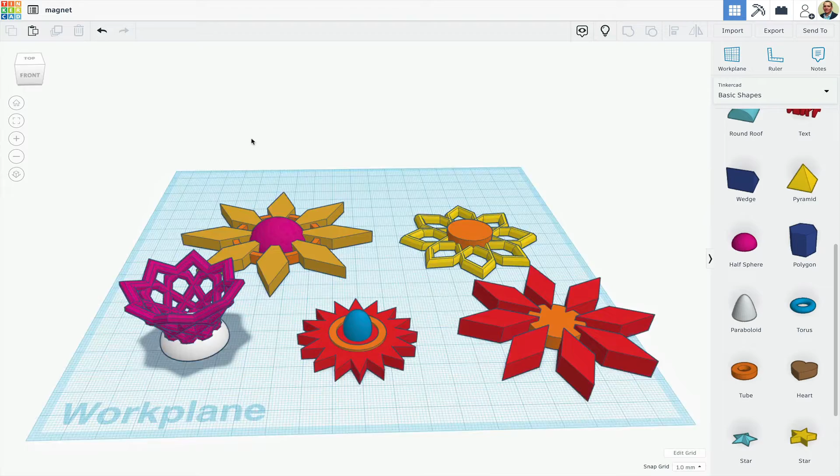Let's do a walkthrough of a way to use duplicate and repeat with rotate in Tinkercad's 3D editor to make designs like these. I want to turn this box into a diamond shape, so I'll rotate it 45 degrees, remembering to keep my mouse within the degree ring of the rotation circle so that it rotates in 22.5 degree increments.

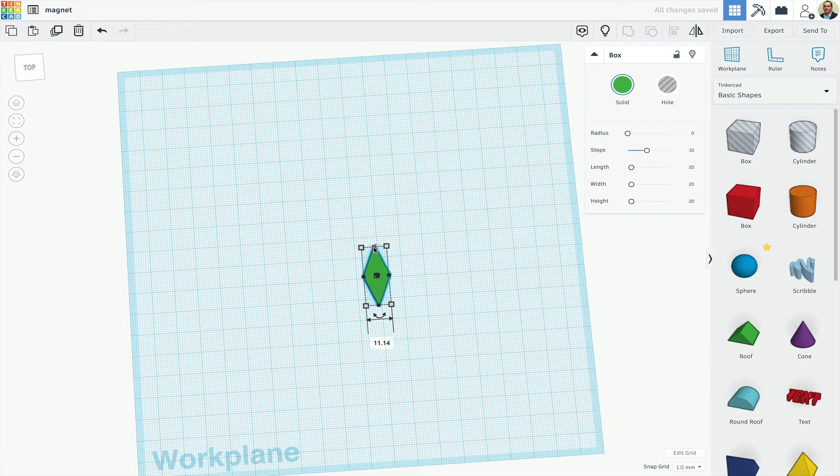Then I'll make it skinnier and longer. Next, I'll bring out a cylinder that I'll size down a bit and max out the number of sides so it's smoother.

Now I'll hit the duplicate button or click Ctrl D to copy the diamond. I can align these shapes with the Align button or just typing an L, and they align properly in one axis but not the other.

I'll undo that, move the diamonds a little closer together, shift-click on each diamond but not the cylinder, then click Command G to group them. The diamonds now act like one object, and they will align properly with the cylinder.

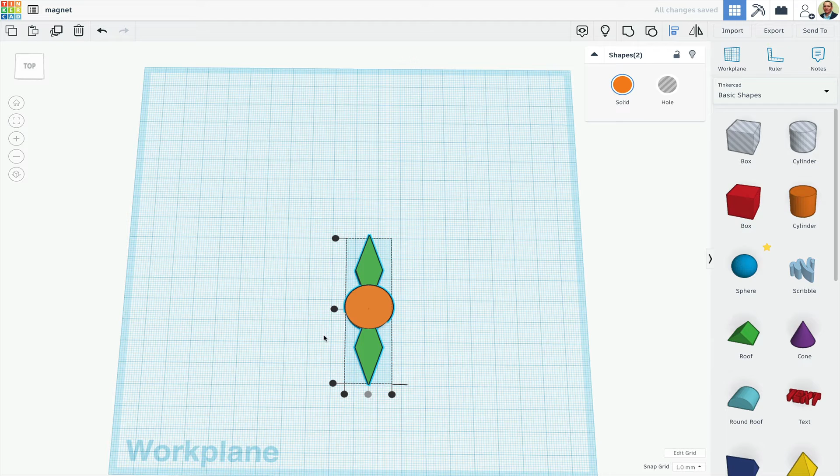I'll click Command D to duplicate and repeat, and I'll be sure to not click elsewhere. Now, when I keep hitting Command D, it will rotate copies by that same amount.

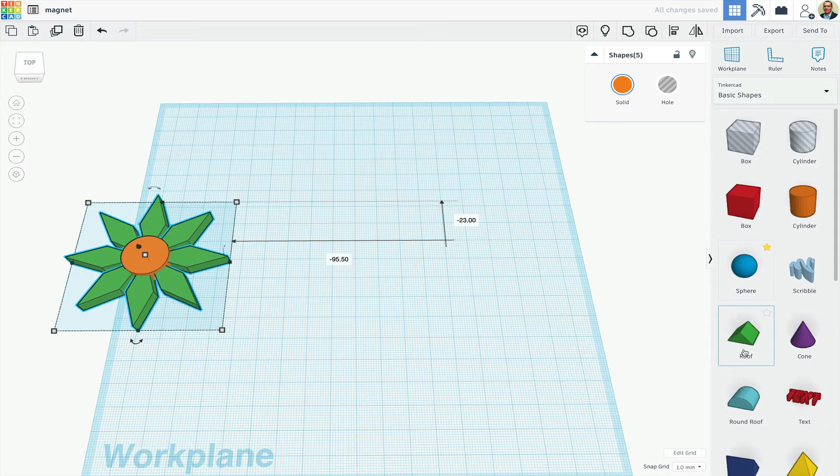Let's work with a torus shape next. Here are the dimensions I'm working with, and you can experiment with the properties that you like.

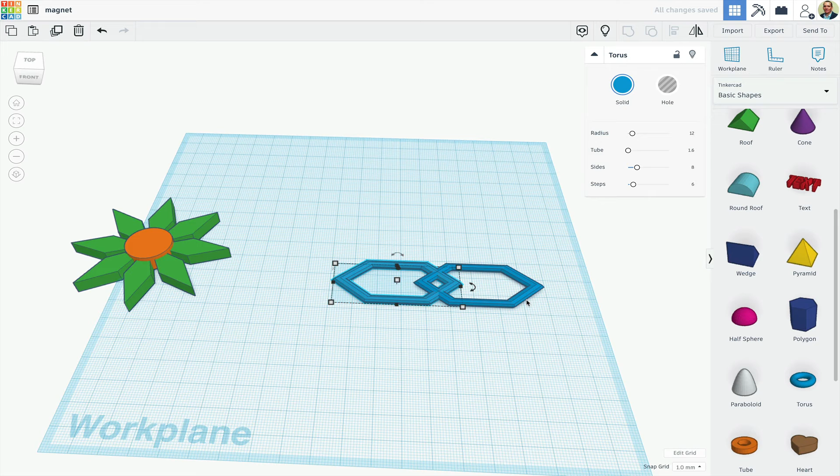I'll stretch out the torus with one of the black handles and then duplicate it. Slide it over with my left arrow key. Select both shapes and use my duplicate and repeat trick to spin them around.

Here's another trick. To make 3D printing this more likely to be successful, I'll raise the height of the design to 10 millimeters.

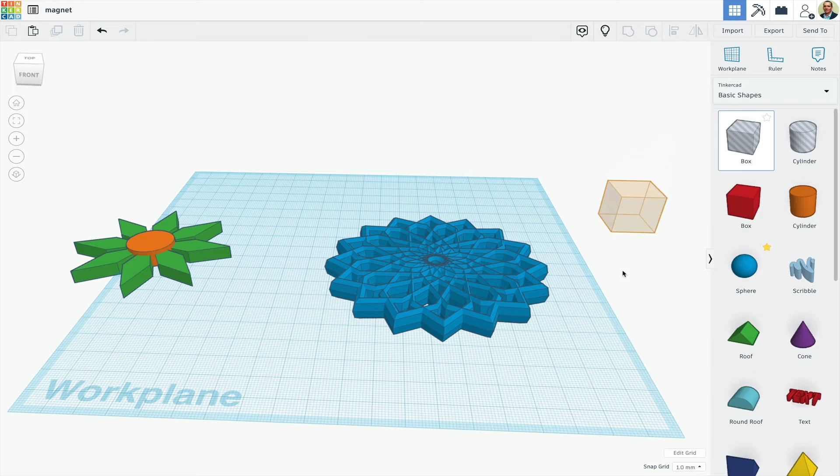Then add a box that's a hole at half that height, 5 millimeters. When I group these, it will slice off the bottom half, making the bottom flat and better for printing. Type the letter D to drop it to the work plane.

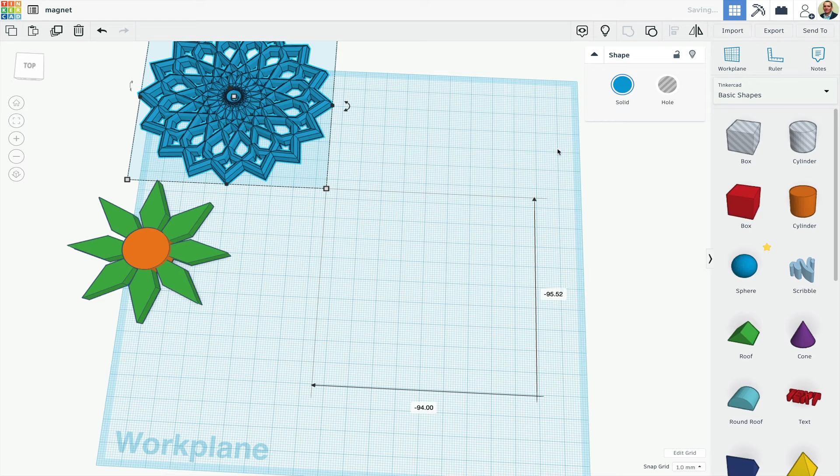Finally, there's even more we can do with a torus. I'll give this one similar properties as the first. Now I'll rotate it 45 degrees up, type the letter D to place it on the work plane, hit Ctrl D to duplicate it.

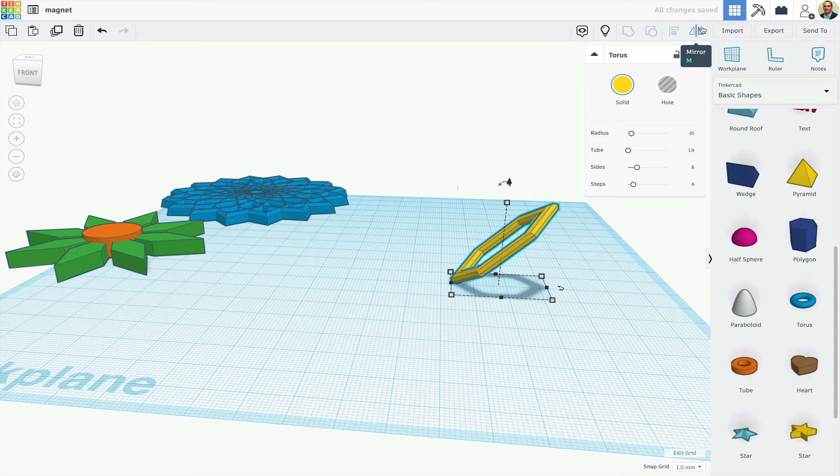Type an M or click the mirror button, and then flip the copy in the opposite direction. Slide the copy over with my left arrow key, select both, duplicate and repeat, then rotate.

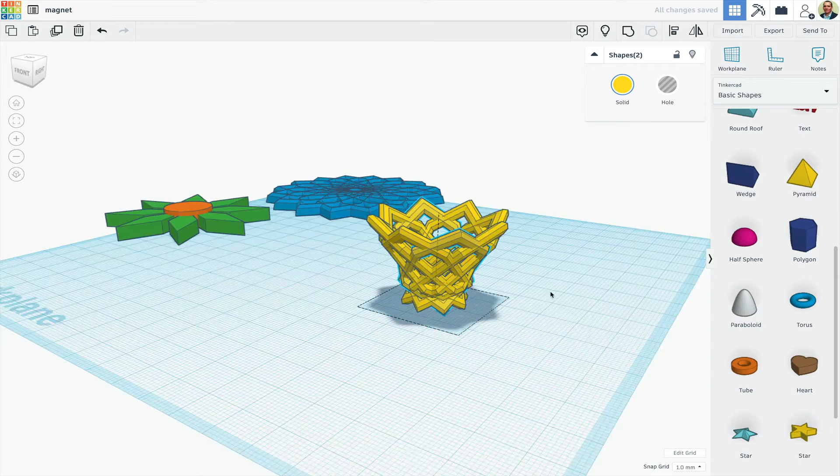I'll add a base shape, but I'll group the torus shapes before aligning them to the base.